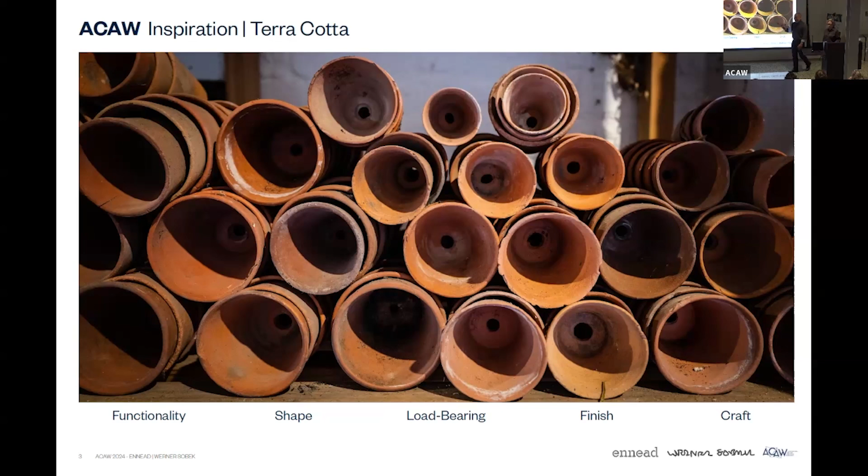We wanted to start as a team and ask ourselves what inspires us about terracotta, and what we were going to look at as we began our design exploration. We wanted to look at things such as functionality, shape, the idea of a vessel. These vessels are usually load bearing. There are so many opportunities for different types of finish, whether it be texture or glazes. And the idea of the craft, the hand—what about terracotta makes you feel so connected to it? It's the earth, but it's also the fact that it looks like it's been made with an artisan feel. I wish we could also add the Guaranty Building onto this, and also the Boston Valley Terracotta plant, which we really enjoyed touring, and it was very inspiring for us as well.

As drivers, we wanted to make sure that our study was also a holistic approach—environmental performance, embodied carbon, all these things have to come into play. In the performance category, we looked at things such as natural ventilation, evaporative cooling, solar shading, daylighting, and views. For the fabrication component, we wanted to make sure it was scalable, something that could actually be implemented onto a project. We wanted to minimize embodied carbon, and we'll show you how we did that as we go through the details. We wanted to make sure we were reducing weight as much as possible through material optimization. The last thing was we wanted it to be a product with versatility, so that designers who used it could modify the system to create a range of design expressions, whether through porosity, surface texture, surface finishing, or the geometry itself. We think that was very important for us to incorporate into our thinking.

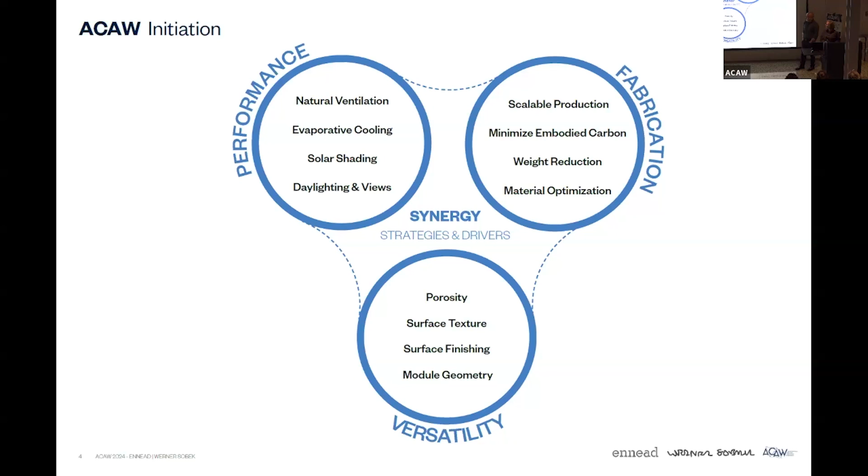This is sort of our dream of what we thought ACAW was going to be, and it's actually surpassed it—like I mentioned with the academic groups, and all the personal connections, as many people have mentioned. We just wanted to put this in here because it expresses our gratitude and thanks for being a part of this process.

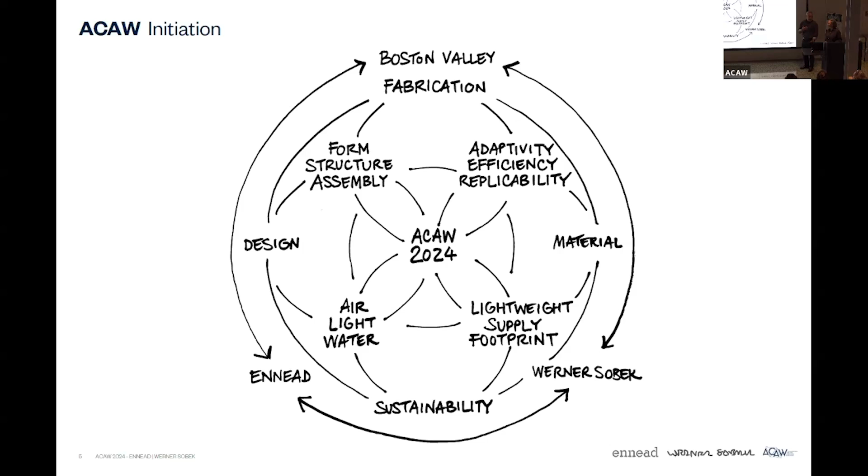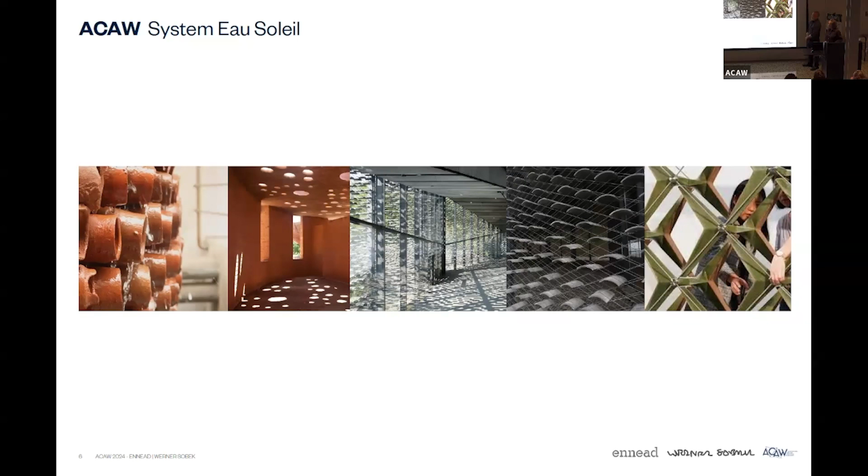So we're going to talk about our system, which we're calling Eau Soleil, a play on Brise Soleil. This is our initial image array, our collage, looking outward at things that have already been done—some ideas of terracotta and water, dappled light, screen elements, and this is one of the studies done from a previous ACAW. This is really a visual representation of some of the initial thoughts that resonated with us as a team. Then we wanted to look inward—I think no design exploration is an isolated island in itself.

I think this is very evident in some of the teams that have participated multiple years in a row, that their designs are evolving, their lines of exploration are continuous, and they build upon each other.

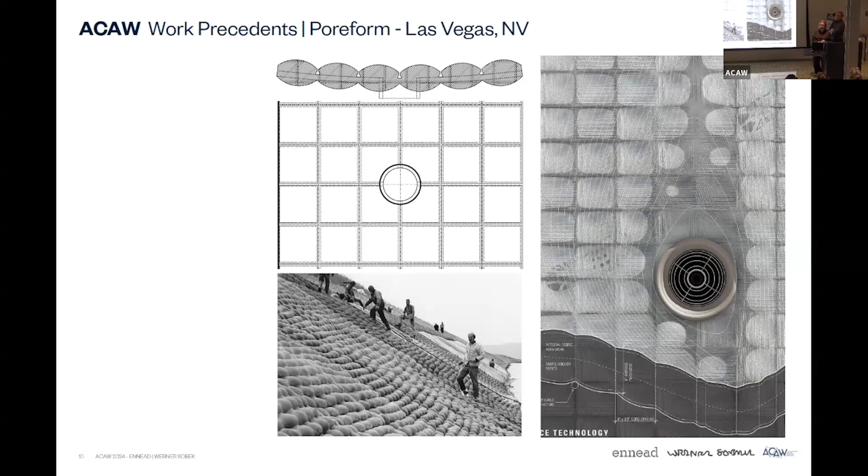When we started this process, we approached the design of a terracotta cooling wall with a series of vessels. But the weight and the secondary structural system that it required just didn't align with our goals for efficiency and visual versatility.

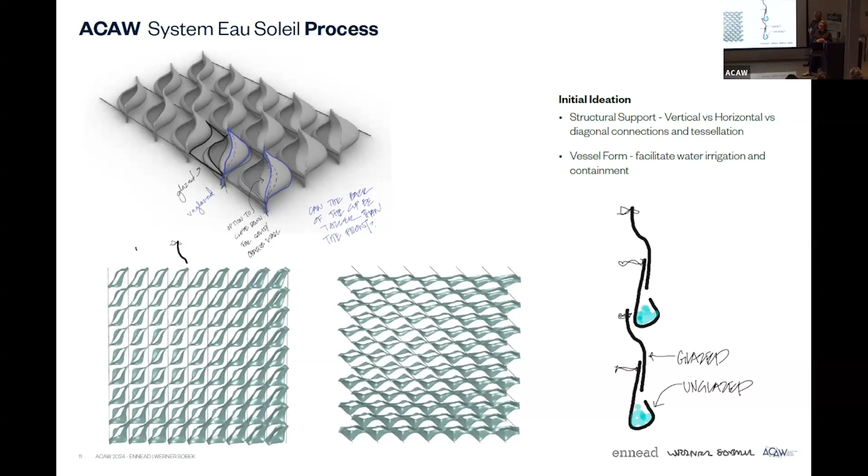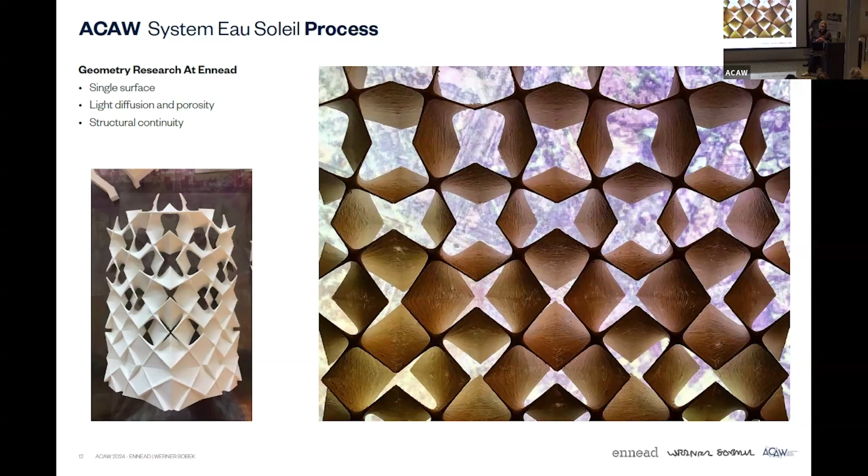So we pivoted to previous geometry research from our computation specialists at the office. We realized that a single surface module would give us the surface area, continuity, and repetition that we needed. Erwin Hauer has been a consistent inspiration for us.

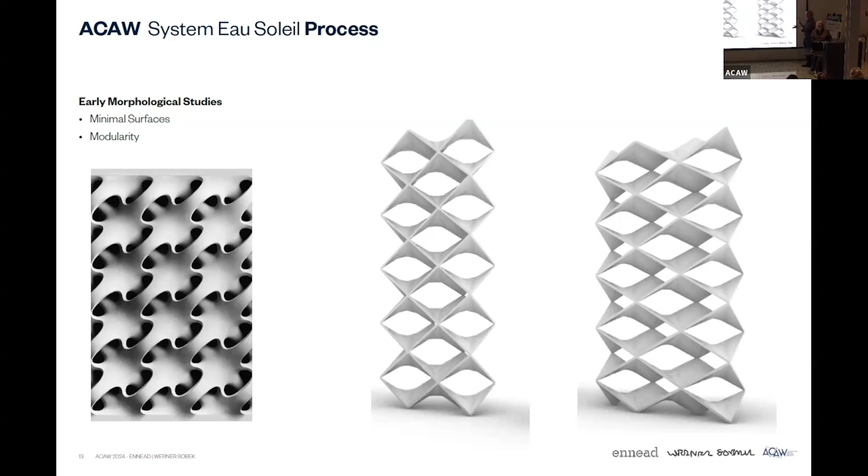We used this design for a screen wall at the Standard Hotel at the meatpacking district. We used it both at the ground level and also at the roof terrace. We actually have a couple of these samples sitting around in our office, so maybe it was subliminal messaging or subconscious that led us to start exploring elements that were a little more derivative of that type of idea.

The design priorities of the approach are performance-based. We kept saying that the project was the performance, it was the space adjacent to the wall, not the wall itself. It was meant to mediate solar impact, heat gain, and mitigate glare. So we'll be efficient with as few components as possible.

Go back one second. One thing we wanted to point out was one of our goals: we wanted the screen to be three-dimensional and viewed from both the inside and the out, with a similar expression from both directions. The cable wall systems are very beautiful, very elegant, but we felt that the stacking of these units allowed us to get a more consistent experience from inside and out.

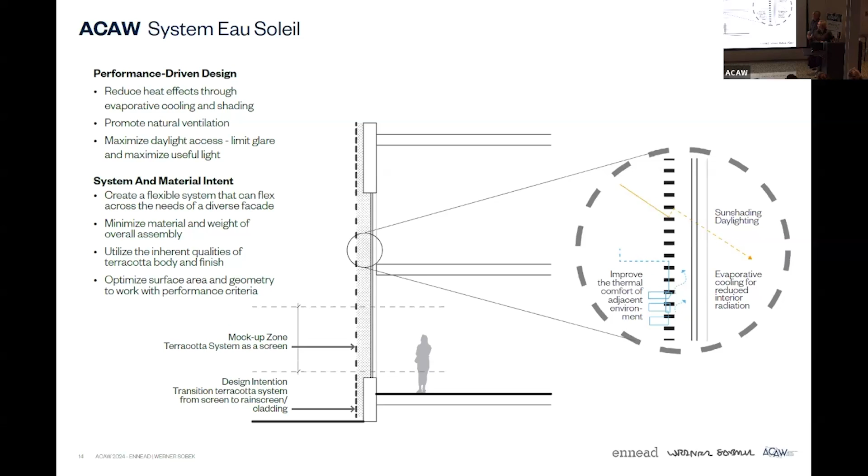Yeah, it was a lot of work to get to a point of a single module. A lot of back and forth, a lot of questions from the Boston Valley team of, do you want this to scale, and if so, keep trying. So we came to a tile that would move the water the way we wanted it to, be repeatable,

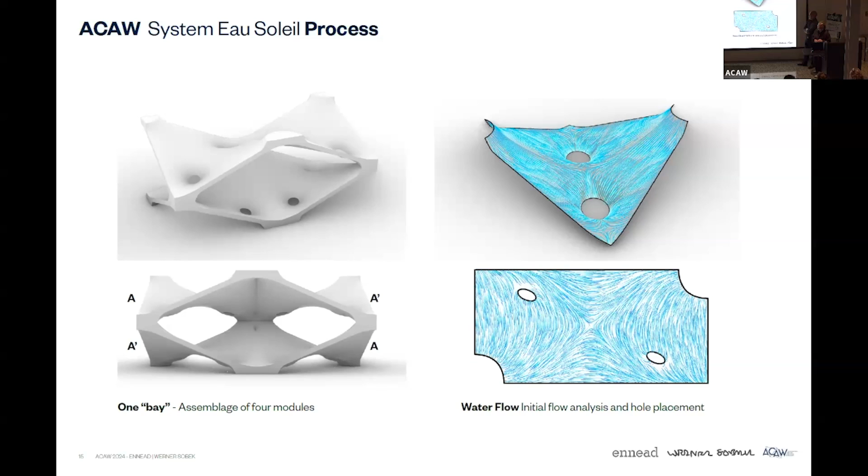and provide the structural integrity that we needed to be load bearing, and for it to be ram pressed. So it's a simple enough form that we can mill up the formwork for the ram, and it will hold its structure in the drying process while sitting on a cradle. And dealing with the shrinkage that required really governed the entire geometry.

We also had to make sure there were no undercuts. That was a big challenge for us with some of the curvatures and the hyperbolic surfaces. We kept looking at it in both the 3D model, cutting through with clipping planes, just to make sure there wasn't anything that couldn't be pressed successfully.

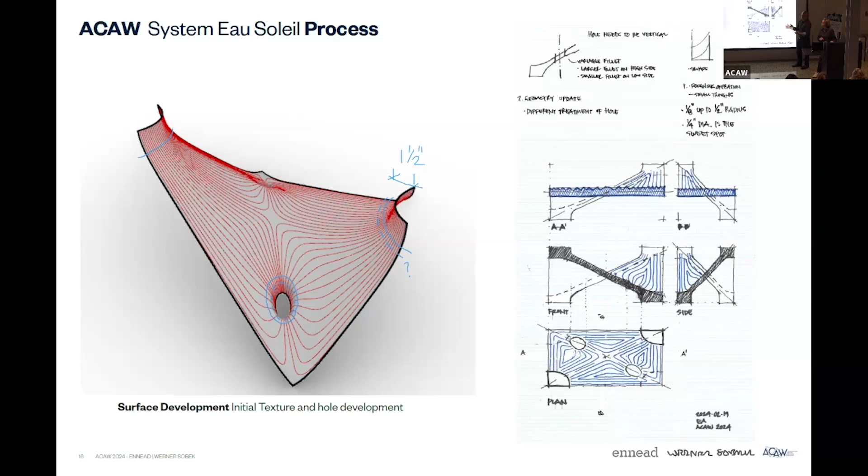So as I mentioned, we really wanted to, like the Danish team, figure out how to control water flow. It's actually very difficult. We started off with different iterations. We thought, okay, what if we just do a smooth surface and make the holes really big? That seems like a no-brainer, right? But it actually didn't work. Everything just kept shedding off the edges.

Then we moved to something more, I think, similar to the Danish scheme, a ribbed surface with channels that started to direct the water to the hole. Didn't work. Then we looked at more of a stippled surface with elongated edges, and that's where it started - we began to see the water pool and get stuck on the surface. And we thought, okay, we're onto something.

And then finally, we ended up with a texture that really reduced the water flow rate. Unfortunately, and this is something we learned, the pattern we produced was a little bit too fine. So in the firing process, it sort of melted away, or smoothed itself out.

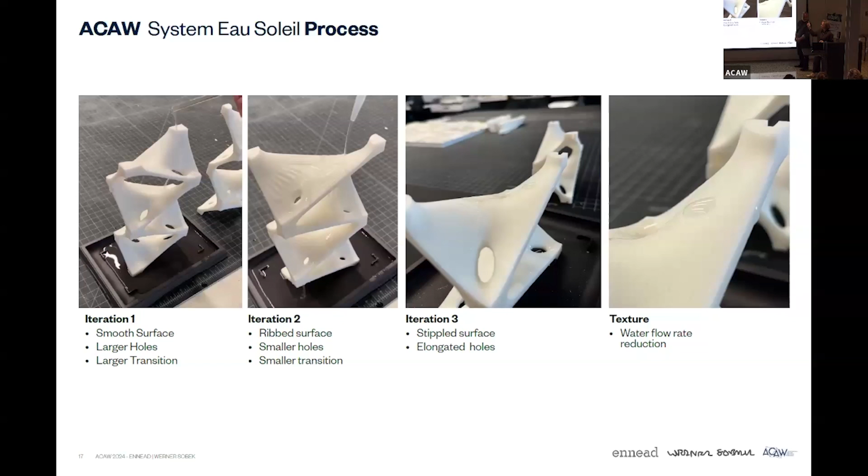So talking to Andrew, it's like if we were going to do this again, we probably want to exaggerate that texture. As designers, we always want everything smaller and smoother, but in this case we should have really amped it up. The more textured it is, the faster it will start soaking up the water. But at least the inherent material friction of the terracotta was allowing it to absorb in a way that the plastic models weren't really simulating.

Yeah, so this is where we were basically trying to optimize the texture. Obviously we didn't optimize it correctly, but this was our goal - we were really trying to look at how the variation of pattern would best slow the water flow down.

One thing I want to point out that maybe isn't so obvious in the mock-up is that all the faces facing up, where the water will flow over, are unglazed. That's because we wanted to maximize the absorption into the unit itself for evaporative cooling, which Amy will talk about in more detail in a subsequent slide. All the lower surfaces are glazed because we wanted that to be more of the daylighting reflective surface that would project daylighting into the interior space.

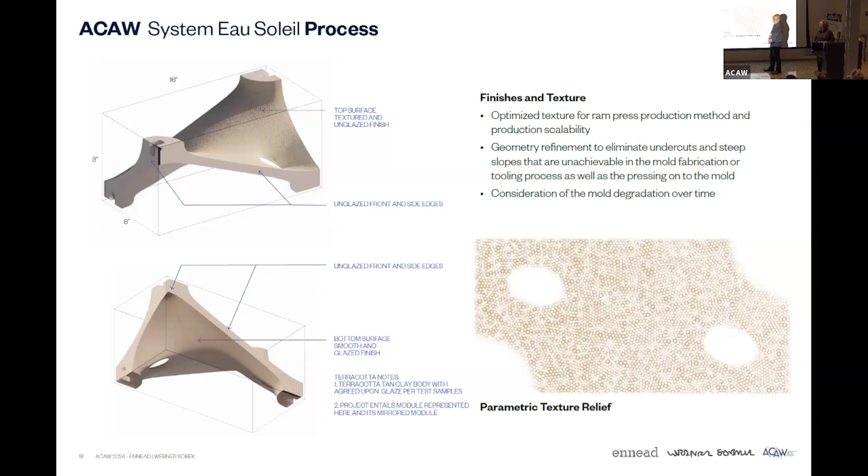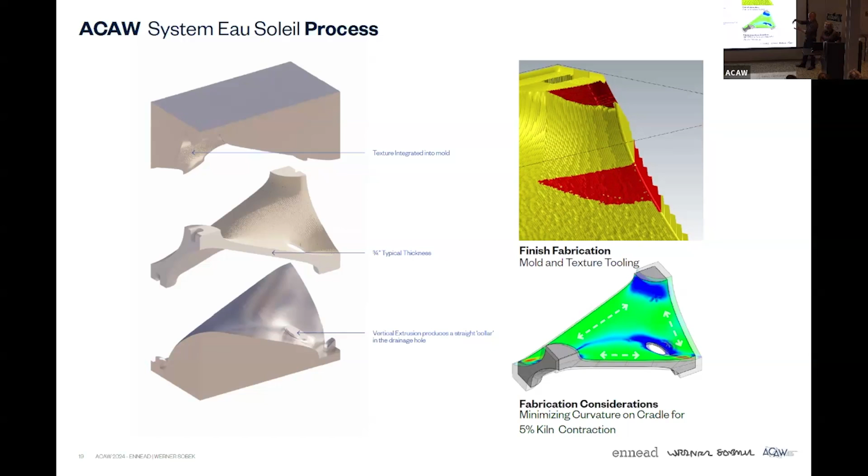This is just to show that there's not only the form and shape of the piece itself, but all the cradle geometry and texturing was another level of trial and error in terms of geometry - it had to be something that could actually be fabricated. Also, as Amy mentioned, and maybe other teams found too, the whole shrinkage issue was something we maybe underestimated. We can talk more about that when we started to assemble it, but because of the form of our surfaces and the curves, shrinkage became an important consideration.

And we were working with Andy, like the other teams did, looking for the right glaze. We wanted something more monochromatic - something on the lower surface that was really just a glazed version of the textured surface below.

This is sort of what the texture we wanted looked like in the smaller partial mock-up sample that we had. I think it's because it's a smaller piece that the texture survived, whereas it didn't in the larger unit. We purposely wanted to keep it monochromatic so that as water starts to flow through the wall and coats the unglazed surface, it's a really poetic transition between the glazed surface and the unit - it actually looks glazed from the water flowing over it.

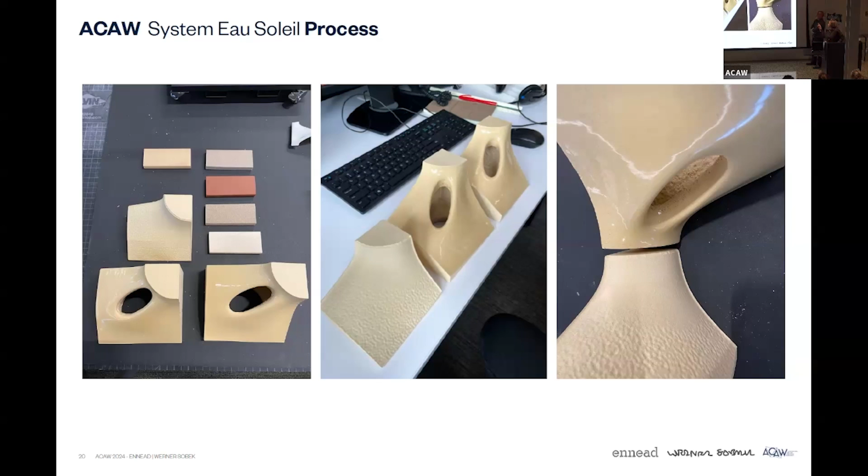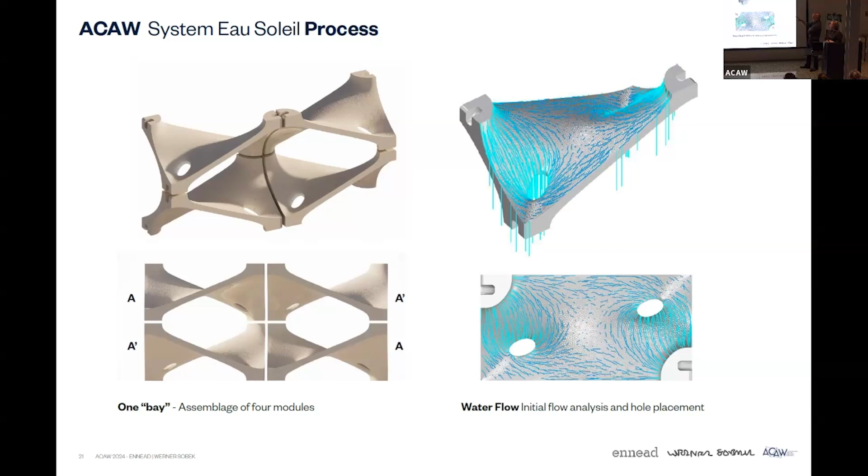One of our applied computing guys back home, Robinson Strong, created a custom plugin that runs in Grasshopper, using physics simulation. He did a simulation where it dropped beads of water and showed the pattern of the water flow. This gave us assurance that what we were doing, at least from a geometry and texture standpoint, would work in the actual prototype.

We wanted to give people variations. What we picked was the most efficient shape in terms of its unit and the way the load transferred. The load bearing issue was something we really wanted to maintain, so the load transfer was happening in straight lines. We understand there might be variation people want to build in, so these are some quick tests we did. It's still 2 units, just rotated 180 degrees in different combinations, so you could get a fan shape profile, or an almond shape facing outwards, or something more dynamic with an asymmetrical composition.

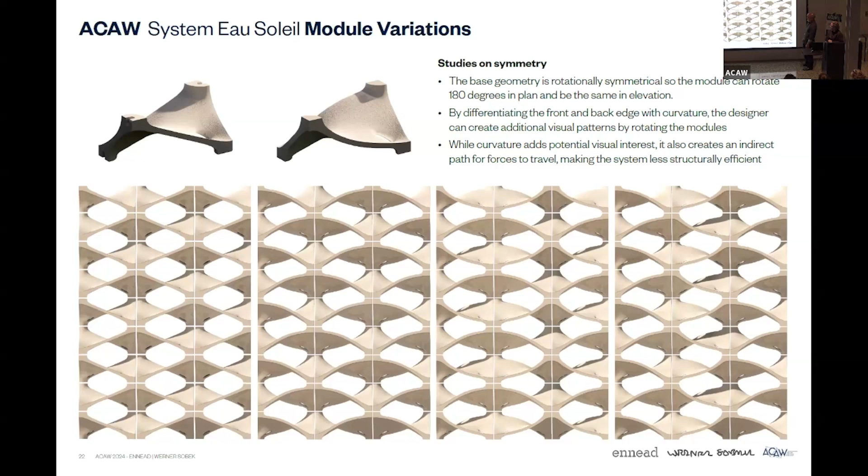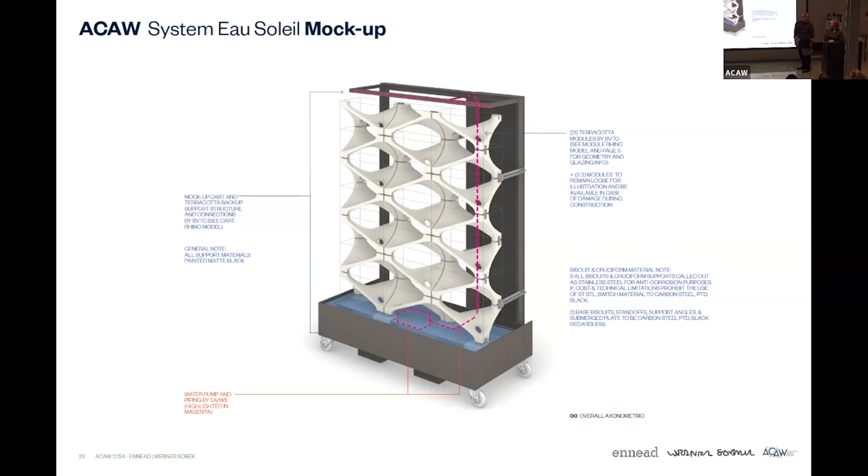These were just some drawings. We really wanted to thank Boston Valley for all the work they did. We wanted to do something a little more complicated with our cart because we needed water flowing through it, so we worked with them on a detailed understanding of what this cart would be. Although, like every cart, there were some hiccups, we think it turned out well. This is just the level of detail we got at.

When you look at these drawings now, we both kind of laugh because of the level of tolerance we showed in terms of dimensions, like how much space between the biscuits and the glazing pockets that the terracotta units receive. We planned for tolerance, we just didn't plan for enough tolerance. One thing this points out, it's like 101, right? Slotted holes for your bolted connections, something we didn't do. So we needed that.

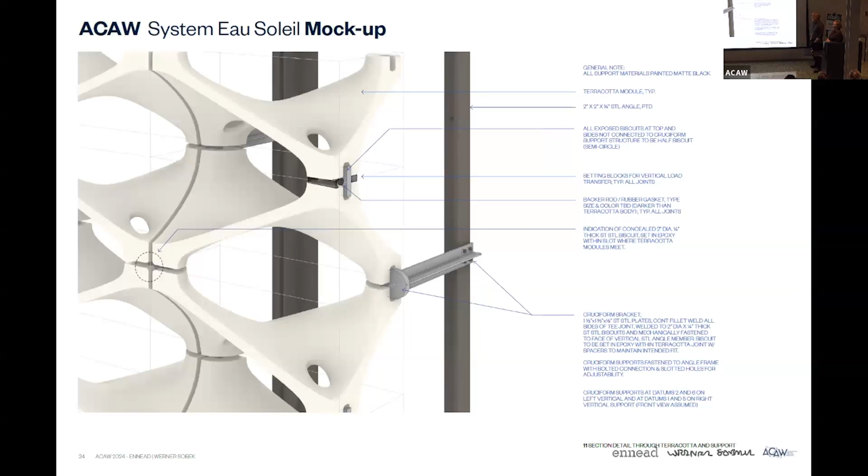This series of photos always makes me laugh, it's like a range of emotions. The first day, the pieces are amazing, the clay side, everything turned out well. Then this is where the dread starts to set in - we started to place them and it didn't quite fit on the base, it wasn't spaced correctly, and we were thinking how are we going to get to the 7 levels we need to stack them to?

Thankfully, for some of our honorary team members - it wasn't our idea, but Sion from University of Michigan was walking around and joined our team, giving us the idea of doing a jig where we clamp the lower levels together so we could try stacking the units up to get to the lateral outriggers above. That was a real time saver - it took maybe 3 hours to get to that point, and the rest happened in an hour and a half. Two of her students, Sydney Sinclair and Taylor Douglas, were major helps for the entire process. Maybe she saw the dread in their eyes after 3 hours working at the base.

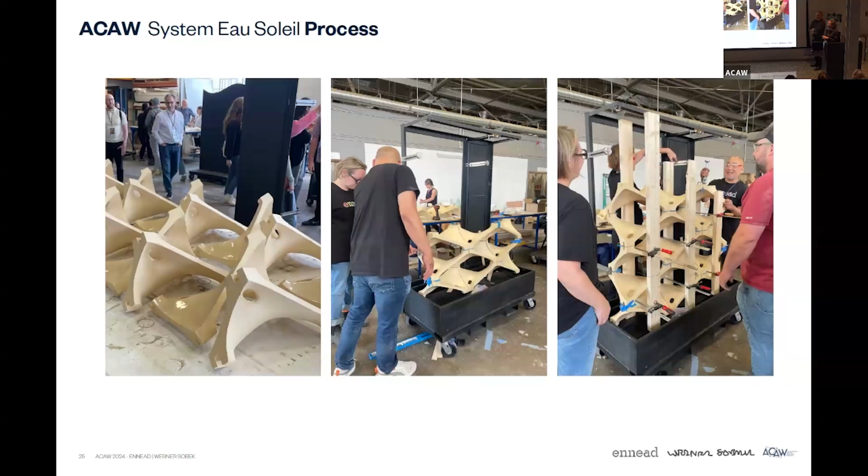These are just some photos of the mock-up before we turned the pump on to test the water. For the color of the terracotta, we were looking at something a little more white - we wanted it washed out, but used the more tan color for the purposes of this workshop since we needed a more efficient body. When the sun hit it, these pictures look a little more yellow than in reality - it's really quite beautiful. You can start to see the idea of the glossy reflective surfaces versus the matte surfaces at the bottom.

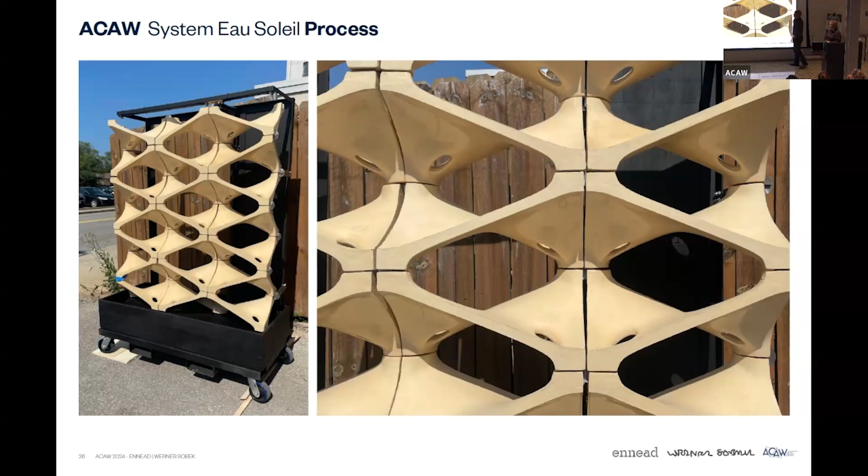The structure of the system is really a collaboration between the geometry and material properties. The terracotta is performing in compression, which allows it to be a self-supporting lattice. The stainless steel discs that slot in at the feet act as lateral support for the units, with stainless steel tiebacks providing lateral support for the entire system.

We call them biscuits, not discs. Oh yeah, biscuits, sorry - it made everybody hungry.

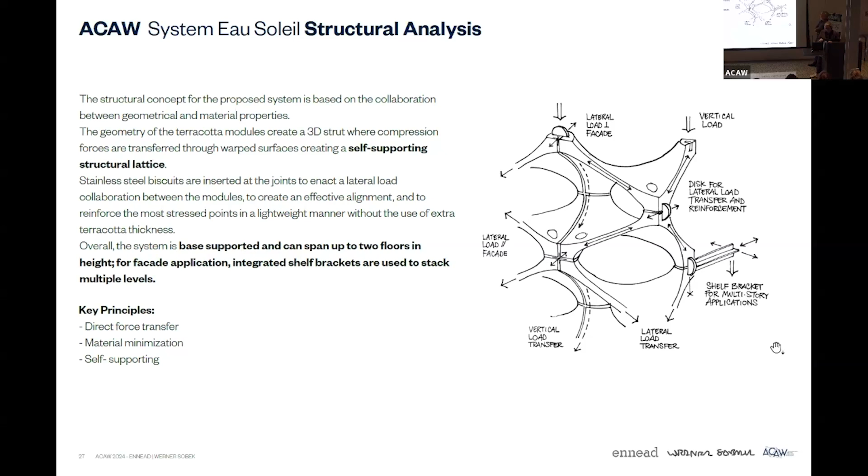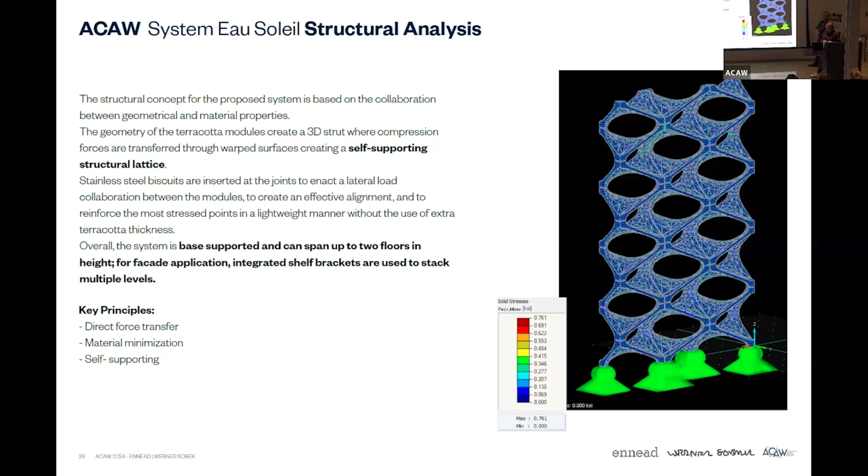You can see that the greatest load is at the base, which is why we would have to have a maximum of 2 levels before you'd need another shelf and start another series. But the system overall is pretty uniform.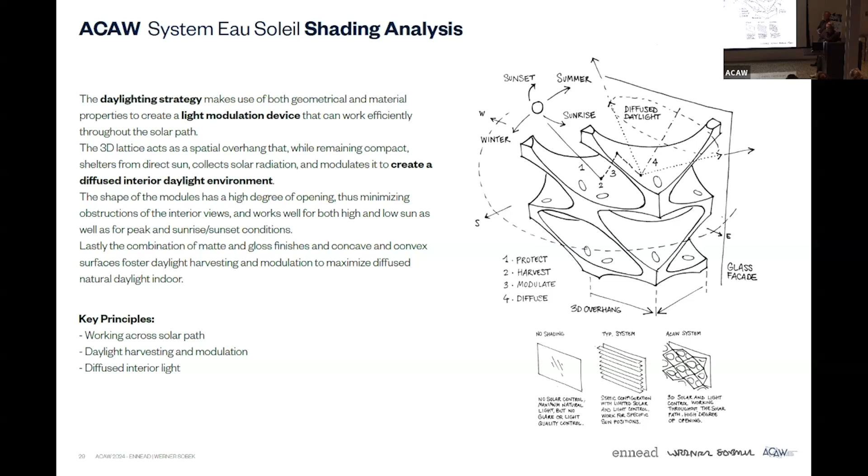The daylighting strategy creates a diffuse interior daylight, allowing visibility through and maximizing indirect light. That's helped by both the geometry and the finish. As Brian mentioned, having the glaze on the underside of the units helps it reflect back into the space. The dynamic shape has also really reduced the solar gain in the wall cavity.

This is sort of a simplistic false color rendering view, but it shows that the 3-dimensional framework is really serving to help mitigate the direct sunlight getting into the space.

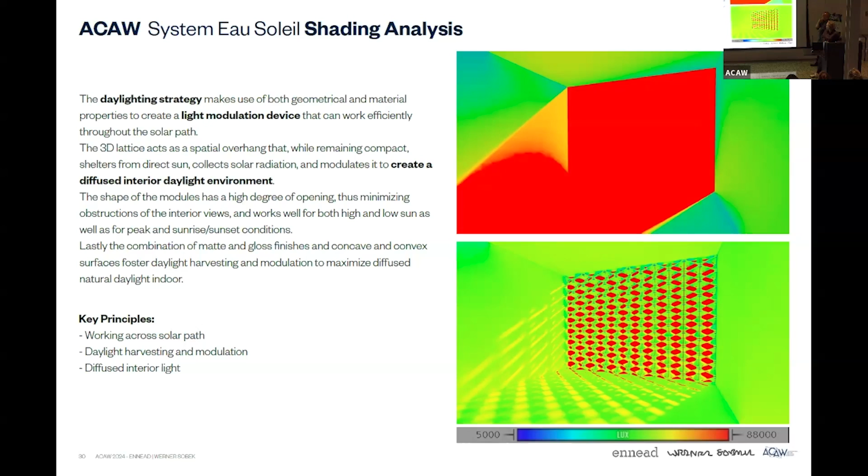We used samples with the same terracotta body so that we could test the absorption and evaporation, in order to know what we were dealing with when we got here, and to get a sense of what kind of temperature differences we might be looking at.

We learned that the water absorbed very quickly. It absorbed in the first minute what it wound up absorbing over an hour. Maybe it gained a little bit more, but it absorbs very fast. So that means we can put a water system with our terracotta screen wall and only run it for a short period, and the wall will become fully saturated.

And the evaporation was a much longer time frame. We didn't sit with the samples until they were fully evaporated. That's on the to-do list of next steps, but we stayed with it for a couple hours, and the wet terracotta is already lower temperature, and then it just starts to fall off even more after a couple hours.

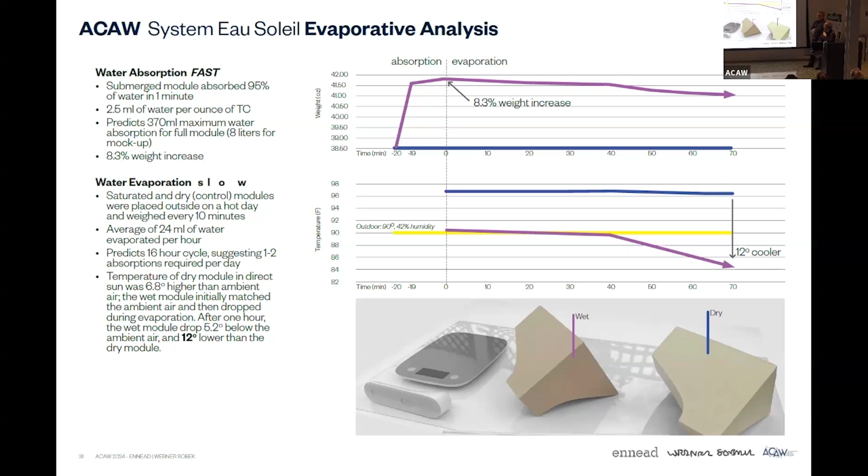Yesterday, Pamela lent us her thermal camera. Thank you very much. We need Pamela for the full analysis, but it did help us validate some of what we were getting from the infrared thermometer. We were testing the saturated system as it was evaporating over time and comparing it back to a dry tile that was just sitting off to the side.

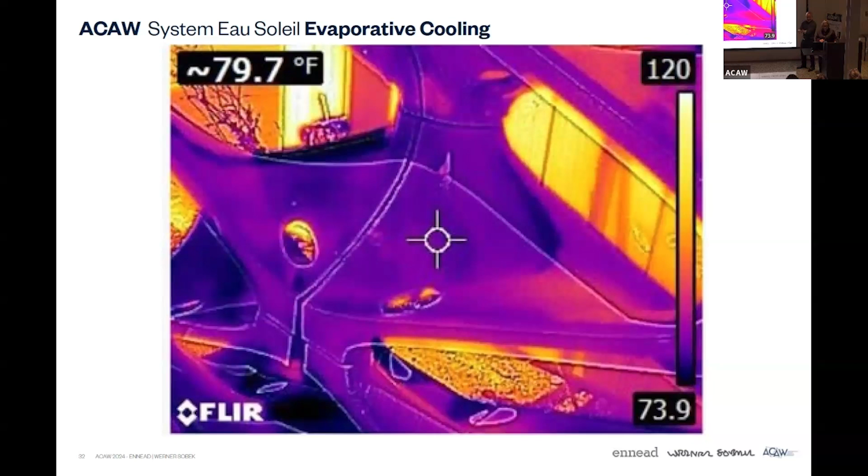You could actually feel the coolness coming off of the wall when you stood next to it. I don't know if some of you might have been there, but it was a really hot day. When you walked by, you could feel the cool.

Let's see. Oh, okay. Is there a video on this one? Yeah, this one. Yeah, this one.

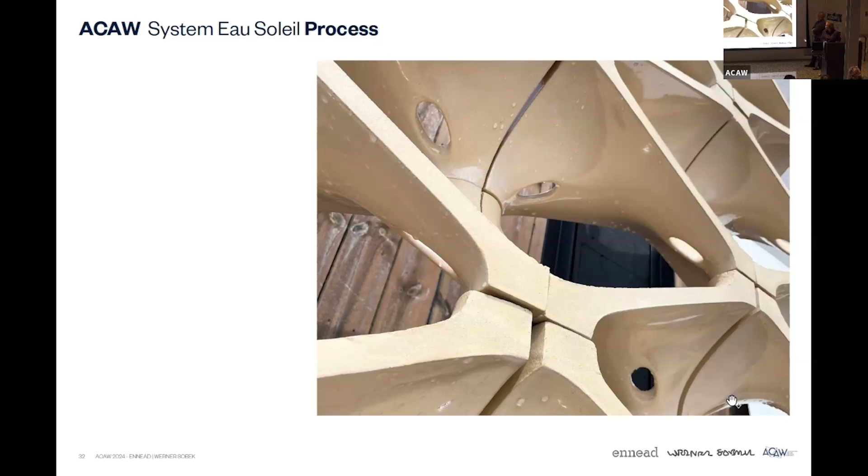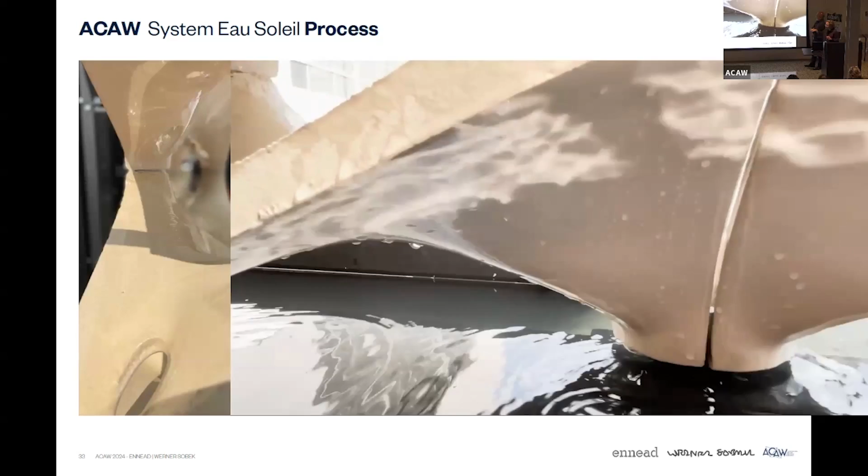And yeah, it was very cool to the touch. One of the byproducts of the sun coming into the water that was at the base was that we also had a little dance with the light in the water.

Here, on the image on the left, you can see that glazing effect that I talked about. The top unit, of course, is glazed. The bottom's unglazed, but when the water starts to come down, it's almost like the glaze is then starting to follow the path of the water.

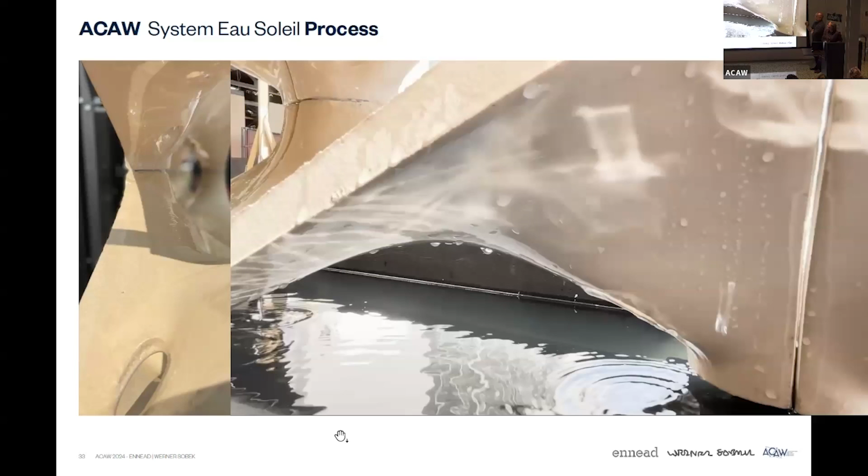This is the backer rod that Brian had to install so that the water would actually flow properly. We gained a new respect for the use of backer rod and its installation. The system is supposed to actually have mortar in the joints - it's a closed joint system. We didn't think it was going to affect the water flow as much as it did, so of course we had to come back and seal those pieces.

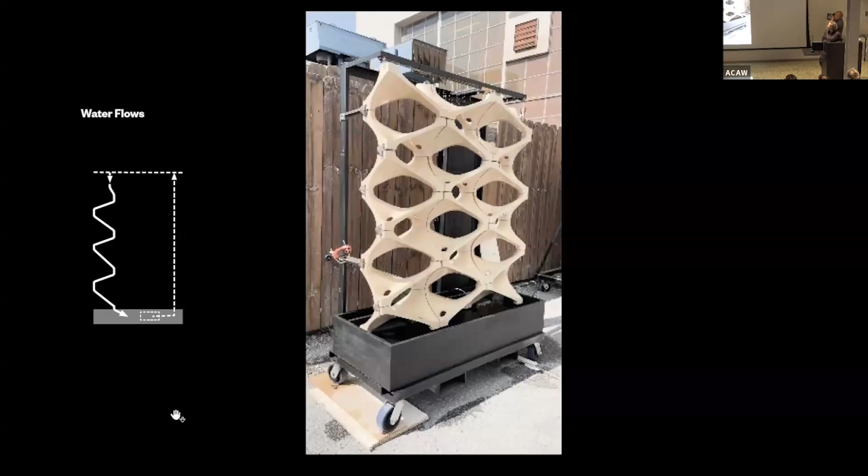Did I miss? Oh, let's see if this works.

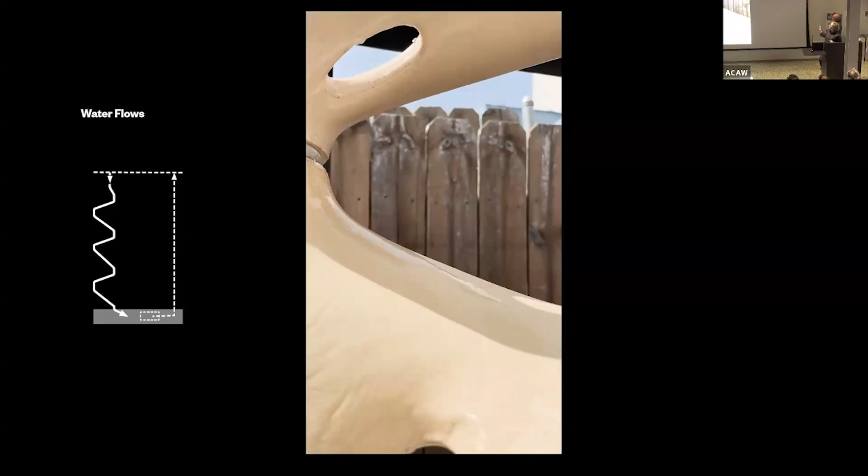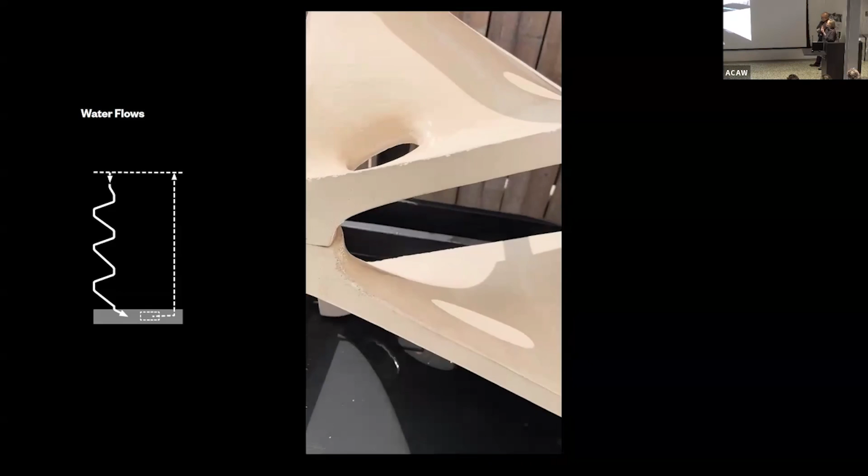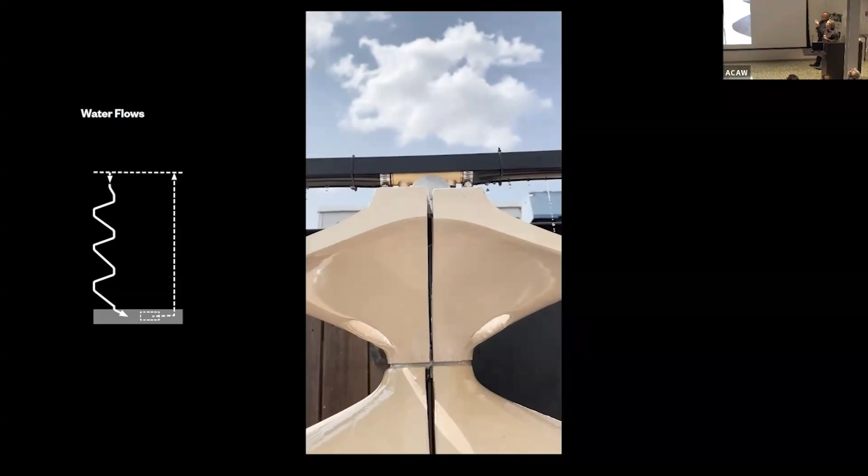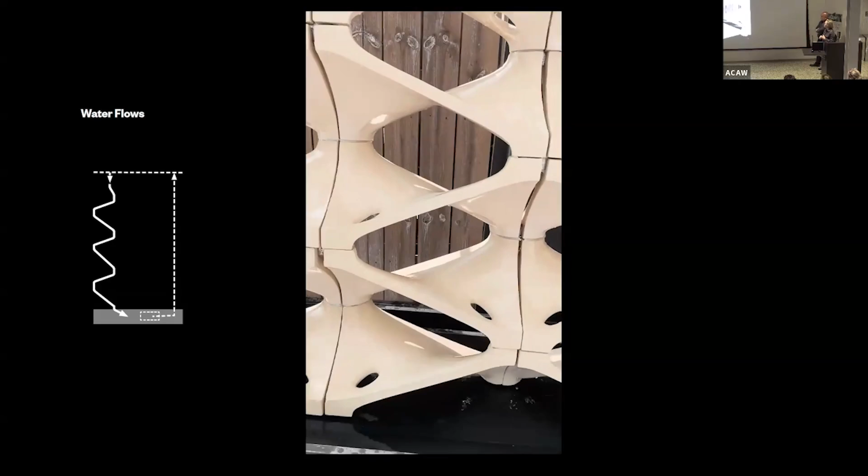So Peter built the entire water system ahead of time in New Jersey and then shipped it here because he wasn't able to join us. But it worked really well. We got the water distributed across the top. The camera is a little shaky, but it's trying to follow what the water is doing. It comes down, then gets pumped back up the back spine and redistributed across the rain hose. You can see the water moving down and through.

We saturated it for about a half hour. What you can start to see from this video too is that as you rotate around the mock-up, the view windows—maybe you could go up and look at the mock-up after the presentation—as you start to look at it obliquely, the window aperture that you're looking out of in terms of vision is really quite open.

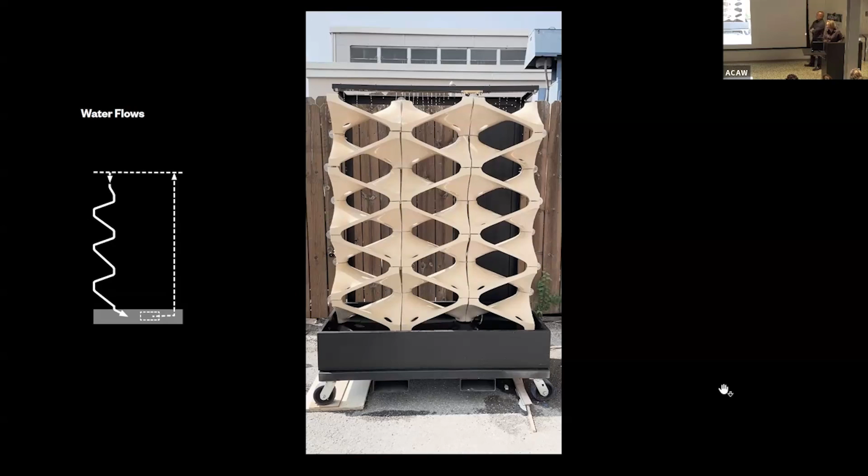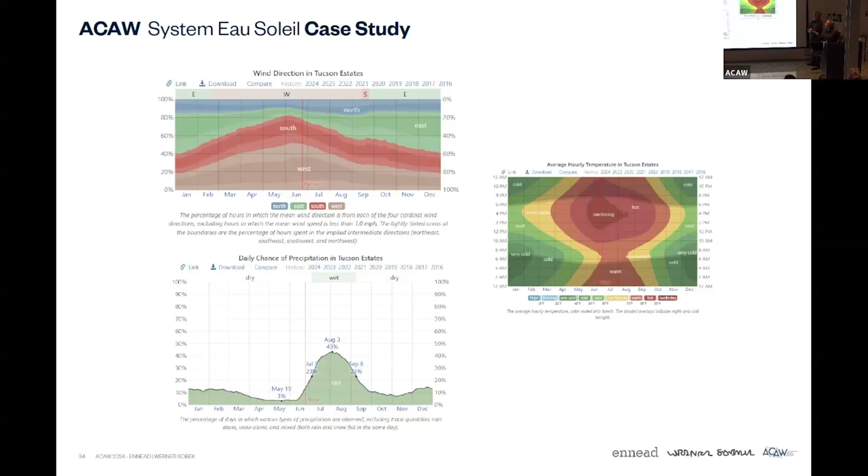We wanted to look at some different conditions. So we said, what does the top look like? We imagined what that top form could be to resolve itself. In the mock-up, it's sort of unresolved, sort of an infinite edge. But we think there could be some kind of cap that happens there, maybe something that can conceal the water distribution system. And then just studying the corner—what really happens there. And where we ended up was that you just basically take one of the units and cut it at 45 degrees, and it miters well and marries with the rest of the apertures happening throughout the system.

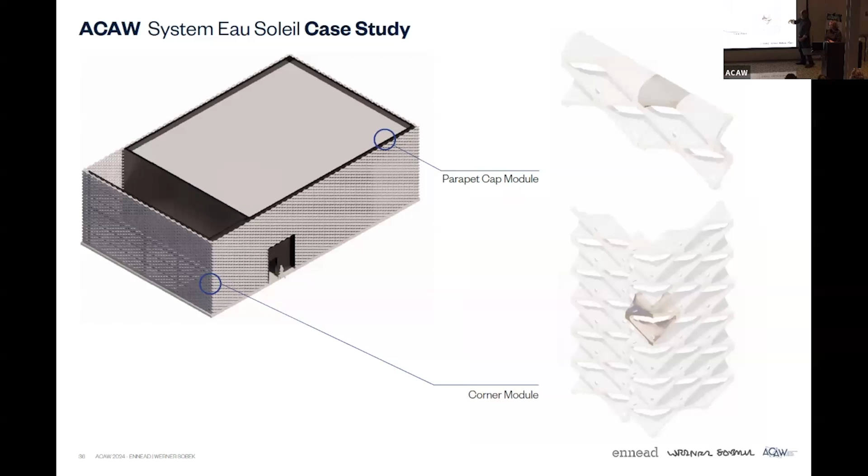Just a day and a quick flip to night—as it turns to night, it starts to glow from within.

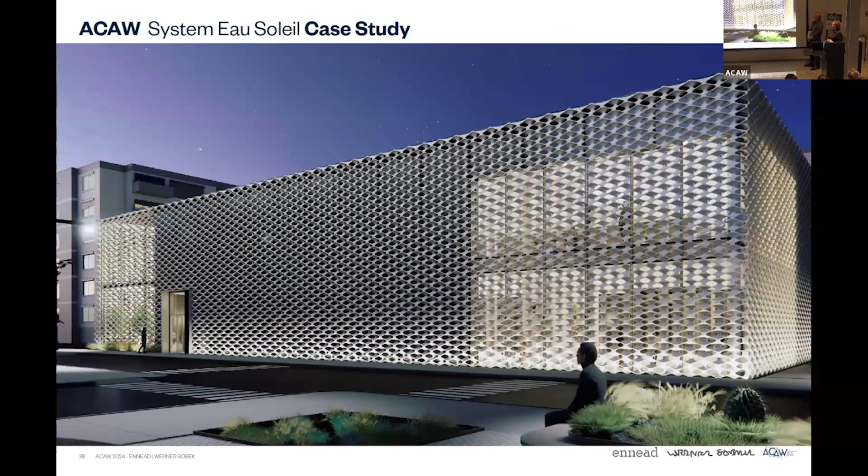And this is a view showing the lack of cable system, or the minimization of the amount of struts that need to come back to the building. As Amy mentioned, I think it can span 20 feet self-supporting. So every 2 floors you could have a relieving angle, but the floors in between could be very much open—a three-dimensional terracotta screen in your vision field.

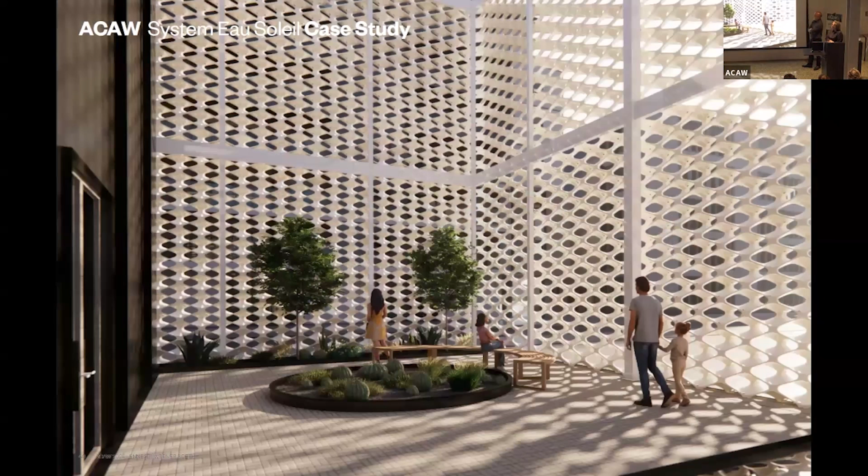And the same goes for an exterior court condition. We're going to install this in the mix patio.

So that's it. And like everybody else, we express our thanks, but we wanted to do it again. So thank you everybody, including everybody in this room, and our honorary team members.